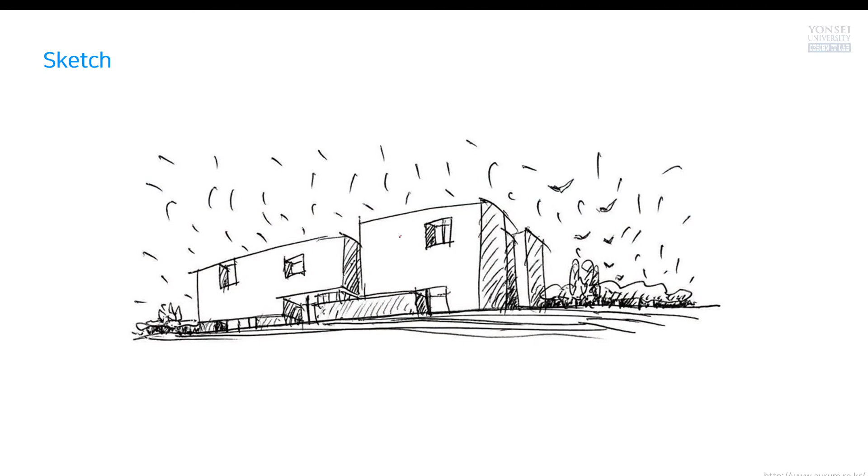First, I'll show you this sketch - take a look, it's a real hand drawing sketch. I'm not sure of the concept, but obviously it looks like some kind of huge mass object.

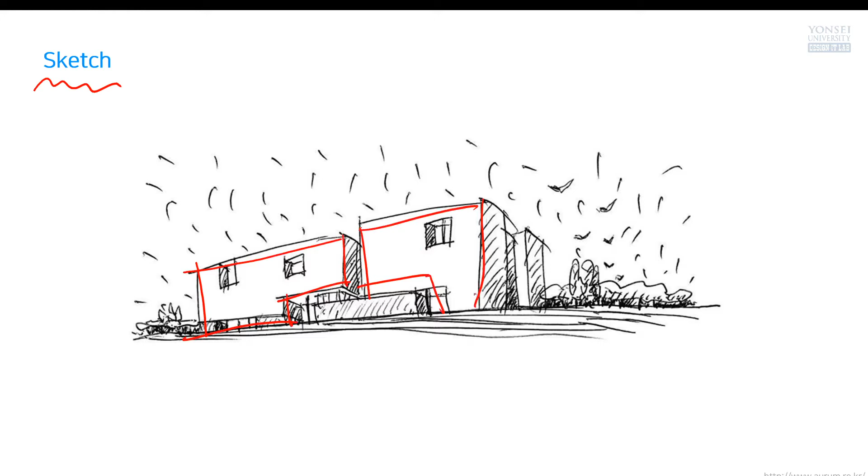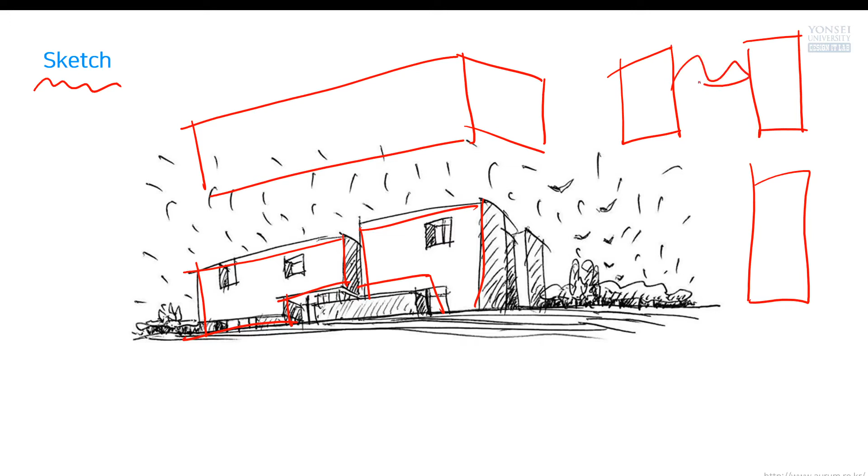But take a look. What if this mass was something like this? One piece of mass, one chunk of mass. That's not that interesting, right? But what if the architect designed something small sized, or high rise, or some totally different shape? In that case, some efficiency or some economical problem possibly happened, right? But this is too boring, too much simple and kind of classic, old-fashioned modern building.

So architect's intent was something cut of the mass here, and something inset, and something divided, and so on, from this chunk of mass. I'm not talking about the concept or some approaches. I like to show you the actual example, actual dormitory. You're supposed to be here anyway.

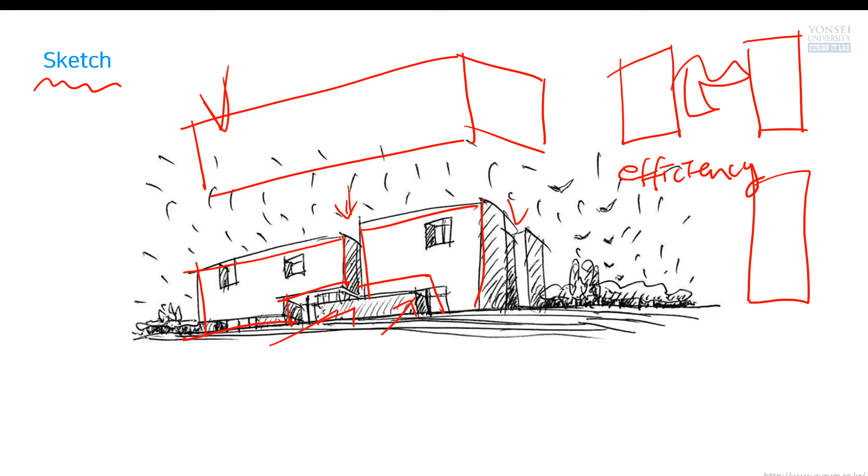Next thing is site plan. I showed you sketch, but actually this is not sort of industry standard. Site plan, this is one of the industry standard drawings. At the beginning of the drawing representation, site plan helps people understand the building mass.

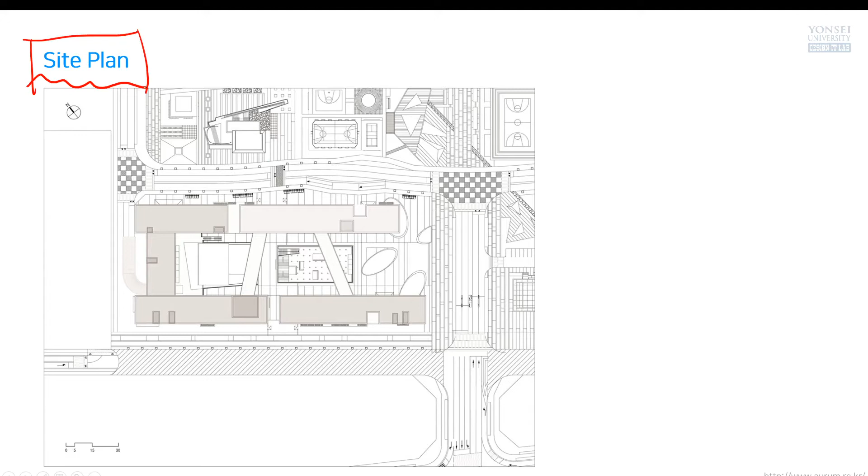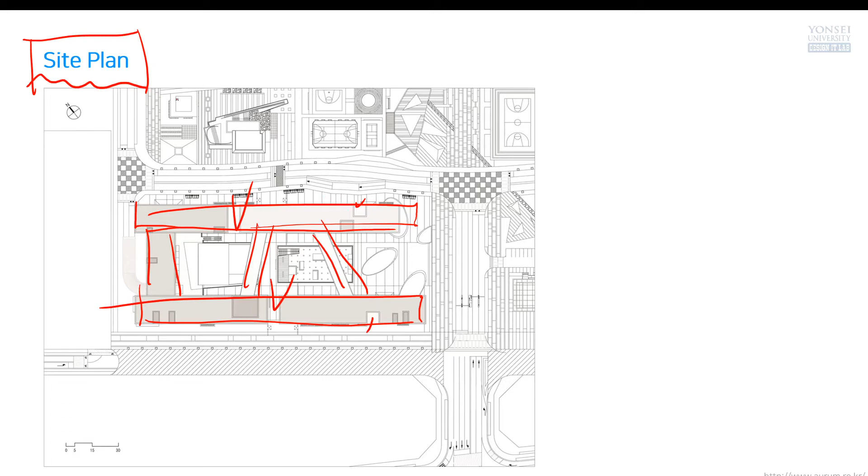Take a look. Two long rectangle shaped and their connection, and two bridges and some cuts, something like that, some insets anyway. So thanks to site plan, we can find out building's mass.

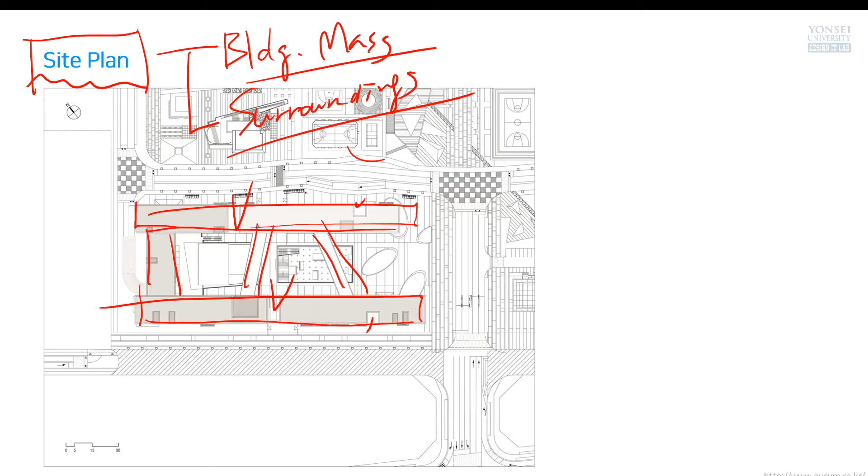Another one is surroundings. So two main things we can get from this kind of site plan view. Take a look, surroundings. Some court for the basketball, I'm not sure, and some kind of gardening, landscaping, and some access road or some certain type of outdoor facilities. I think these are bicycle rack or something similar structure.

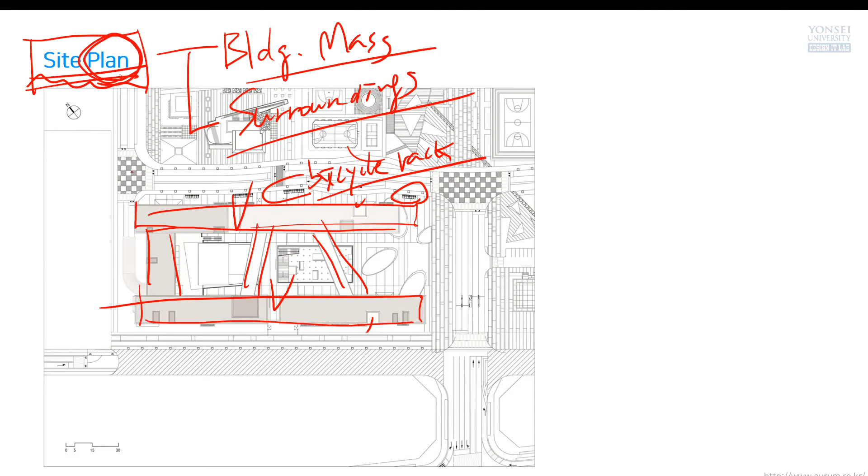Anyway, site plan is one of the representative industry standard drawings. It's under the category of plan drawing, but this is site plan. The most important thing and most representative thing is floor plan. Take a look, this floor plan.

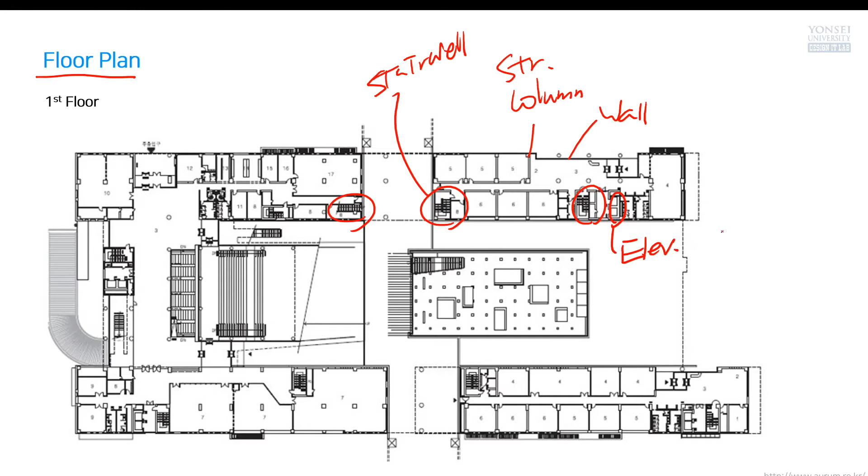Those things are vertical penetration. You know what this means? Penetration means it's opened. For example, what if this is kind of slab, concrete? Penetration is here, okay? You can go up, go down by using stairs or elevators or even ramp or escalators, right? This is slab, floor, physical, actual floor, usually concrete. So this concrete structure mostly covered, but something opened.

That is vertical penetration. Why do we need this vertical penetration? Of course, for vertical access or vertical circulation. For accessing floor by floor, we need vertical penetration, and we usually call it building core. So this building has a lot of vertical penetrations and cores.

Why? This is really huge, actually not that huge, but relatively big sized building, right? So in certain architecture law, architecture code, so-called building code, in Korean, this one - because of building code, we have some kind of minimal placement for this vertical penetration or elevators, number of elevators, number of stairs, or even number of toilets on each floor, something like that. They are all regulated by this kind of code.

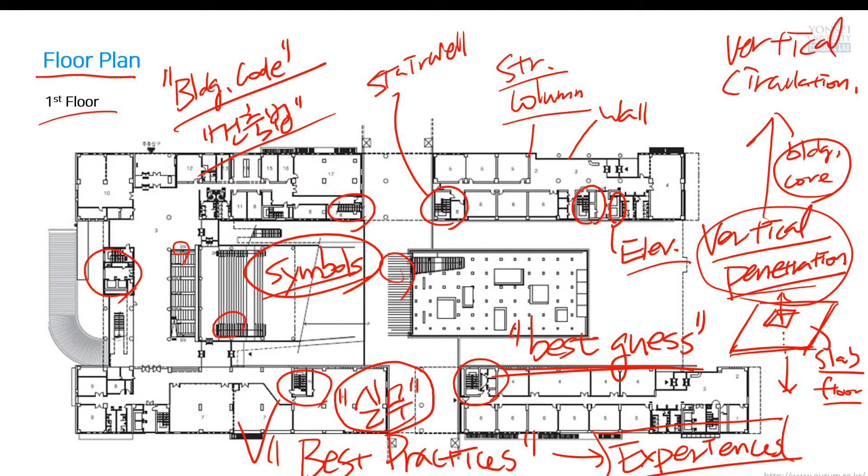Unfortunately, there is no regulation for how to visualize your floor plan. There is no such law, code, or strict regulation. But there are best practices and experiences for how to effectively represent floor plan views using hand drawing or computer tools, BIM tools, software, and so on.

Okay, take a look. Fifth floor, I told you this is a dorm building. A dorm building means as many students as possibly occupied, that's the top priority. I'm not sure about the RFP for this building, but usually we can imagine the top priority is fitting as many students as possible. Actually, I'm not sure this was the top priority requirement for designing and constructing this building, but usually this is very important, right?

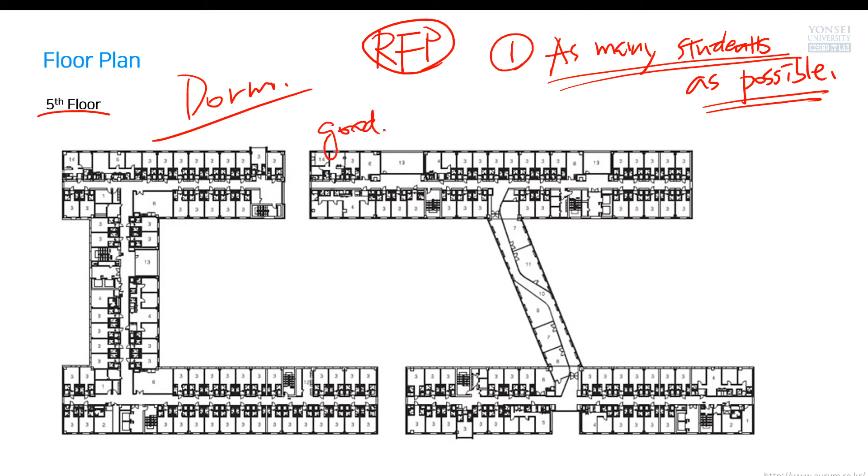So take a look, it looks like a cage or something, but it's not a cage. When we see this kind of floor plan, it looks very high density and not that good for residents. But in my experience, compared to other buildings, other dormitories in other universities, this is really, really good building. Trust me, relatively really good. Anyway, my point is showing you a representative floor plan.

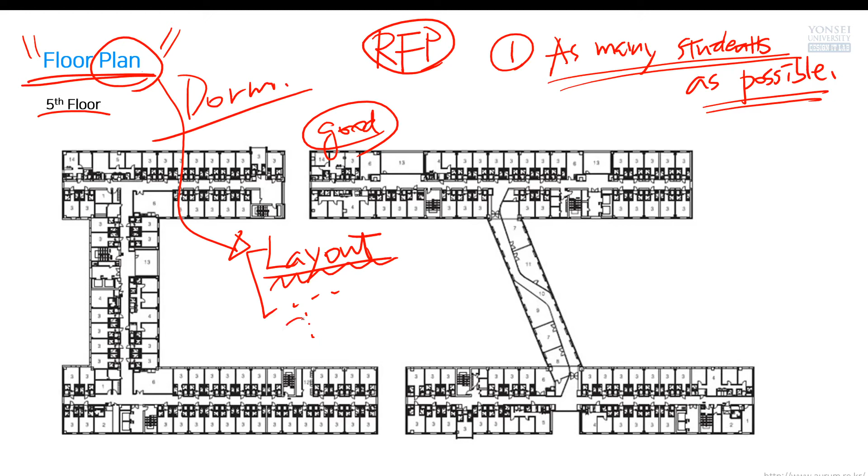Next thing is elevation, take a look, front elevation. I forgot, what's the main goal of a floor plan? It shows you layout, and a lot of something else can possibly be represented on top of this kind of floor plan. You can easily find out the spatial allocation, in other words, the layout.

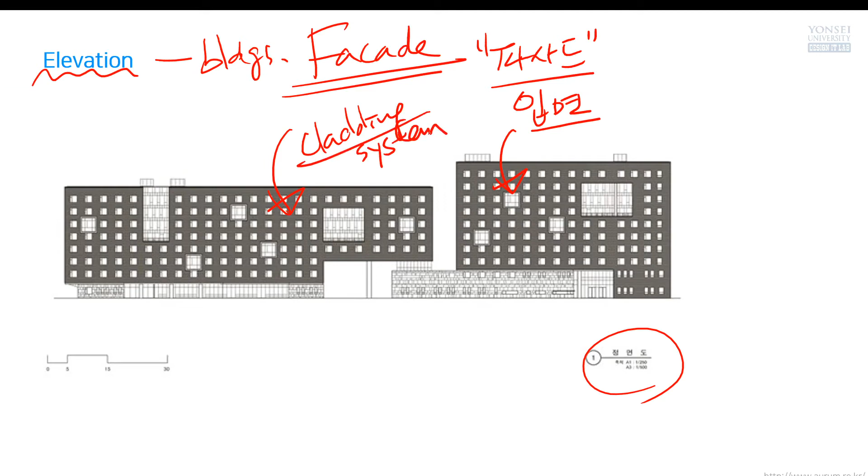So what's the main objective of elevation representation? Buildings, facade. This is a French word, not English. Anyway, in Korean it's the same, facade. Facade means this one. Take a look, what kind of cladding system? You can find out the meaning of this word in a dictionary. Cladding system simply means this in Korean.

Cladding and facade are a little different. Cladding means something about structure, material, shape, or color. But facade is the overall image of the building. As you see, sort of rectangle shapes in order, and some kind of dark colored tile wall structure, wall surface, and some different lower places and cut parts and so on. So the designer's intent was for it not to look like this.

Take a look, just a simple rectangle shape, it's boring, not that interesting. But this one has this kind of cut and something above, something different from the original mass shape. Anyway, thanks to this elevation, we can easily find out the shape of the facade, the image of the facade, and we can make a best guess about cladding systems, materials, or some details, and so on.

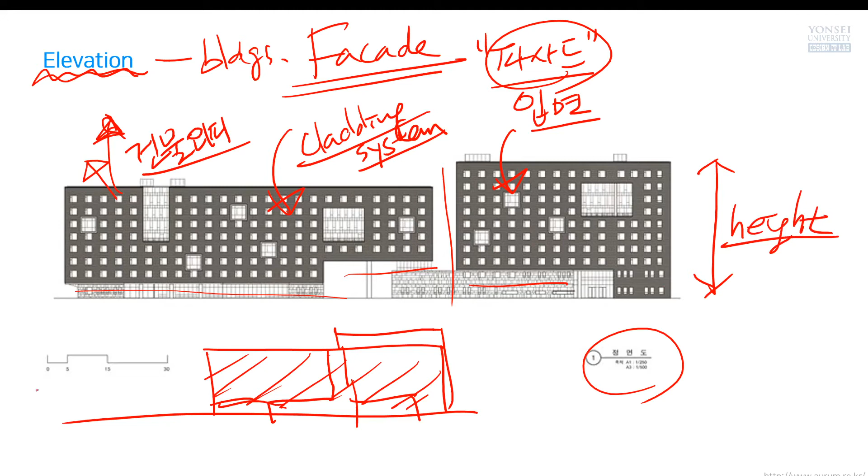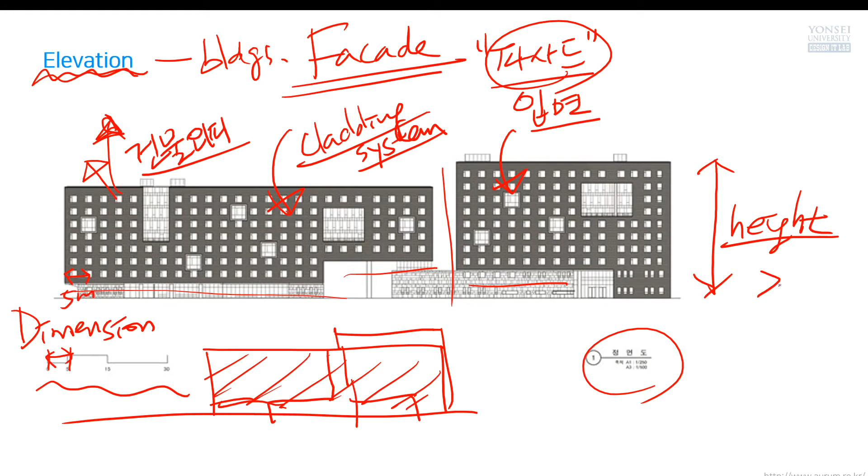And also we can find out height. This is a dimension. Where's the dimension? Probably it was missing from the floor plan view, but thanks to this elevation, we saw the dimension. So thanks to this dimension, we can find out the length of this one is 5 meters, something similar to this, 5 meters. So we can think about the height of this building as taller than 30 meters, right?

Another elevation, right hand, left side, right side, and also dimension is here. You can also figure out the facade image and some cladding systems, looks or material and so on. So that's the objective of elevation representation.

The last one is here, section. Section is very critical because it shows you this kind of vertical circulation and certain type of floor heights. Okay, take a look.

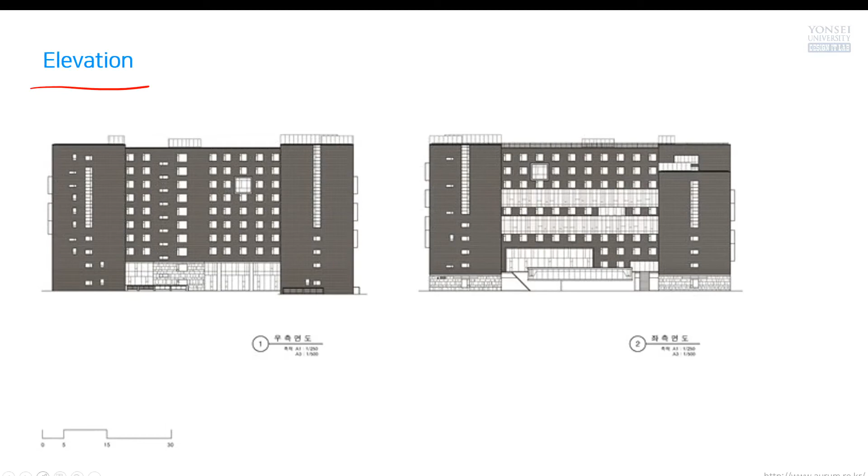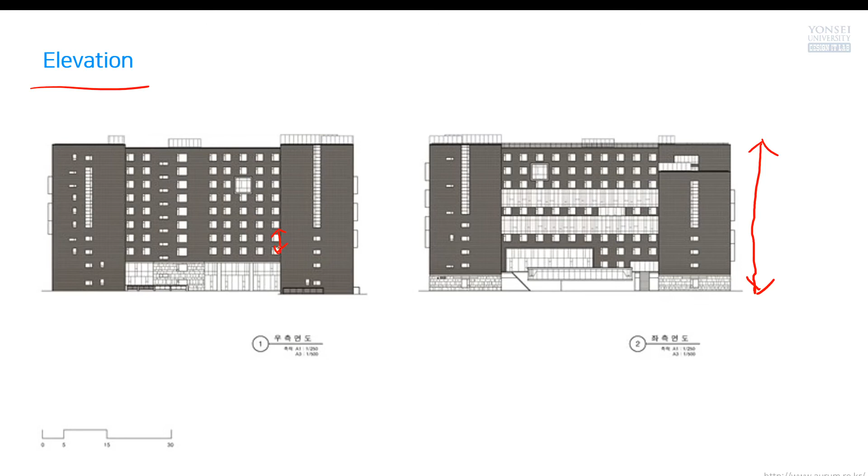In this elevation we can find out the height of the building, but actually it's not that easy to find out what's the floor height, what's the ceiling height, or something else. But thanks to this section, we can find out how many floors are modeled in this design and what's the height of the floor. And this is sort of a plenum space.

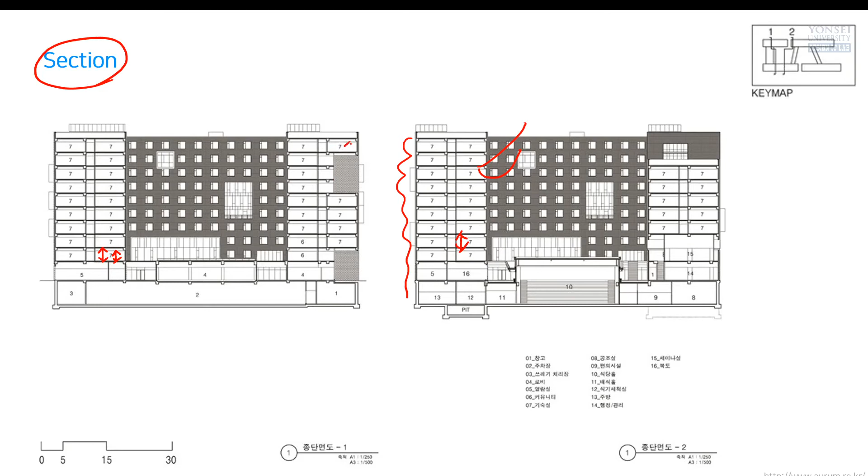This is ceiling, this is the slab. So you can find out, let me show you, it's not that easy to draw this. This is ceiling height, and this is floor height. Again, this is so small, so let me carefully draw lines here. This is floor, sorry, okay let me erase, let me go back.

Let me erase. Okay, I can't erase, I don't know why. Okay, let's do it again.

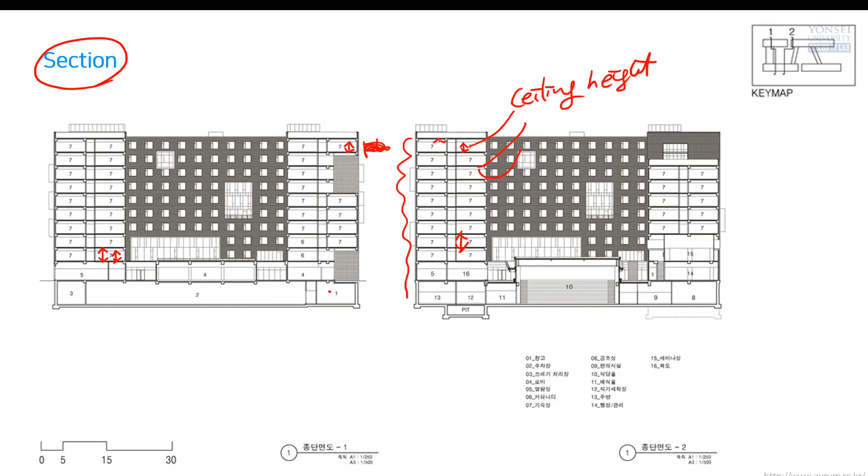The height of this one is ceiling height, and the height of this one, slab to slab, this is floor height.

Thanks to section view, we can find out this kind of ceiling height, floor height, number of floors, and some details about

vertical penetration, vertical circulation, and so on. Also take a look, this is section-1, section-2, and take a look at this key map. This is the section profile.

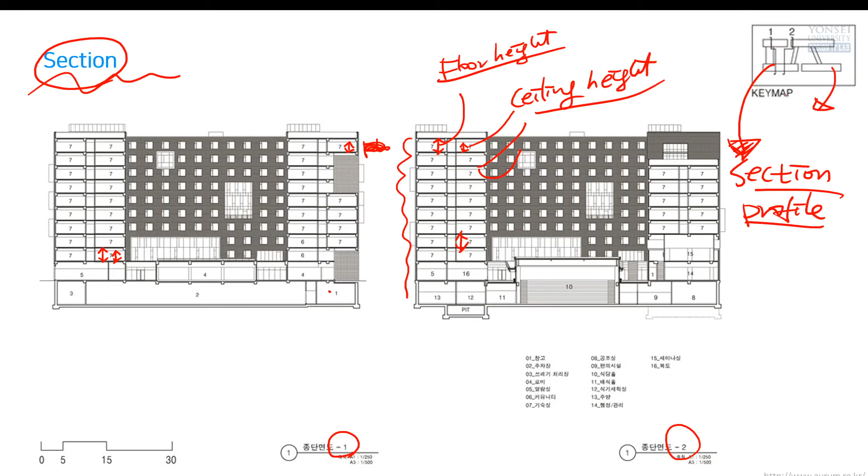Why is this section profile needed? Of course, we don't know where it was cut, or where the location of this section's line is. So by using this kind of simple floor plan view, we simply draw those two or even more lines. This line simply represents the section profile and the location of this cut.

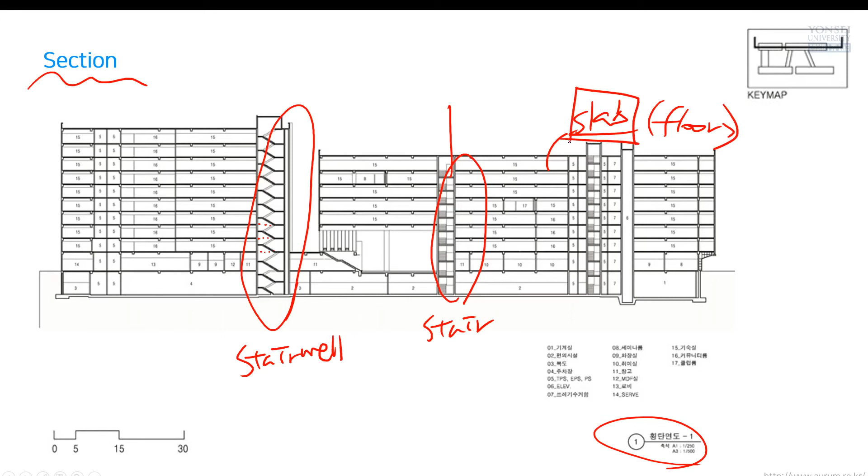Okay, this is slab, in other words, floor, concrete floor, and in terms of building structure, this is slab.

Okay, and take a look, what's this? This is beam, okay, in Korean it is this one. And take a look at this one, I'm not sure, this is column.

Column and beam, they sustain this building because they are sort of very important structural elements, as well as those slabs.

The reason to show you the series of those images, professionally made architectural plan representations, actually these are some kind of additional thing. In other classes or next semesters, in the drafting course, you are going to learn some kind of detailed things about

those symbols and the structures or some representation or something. Actually, they are not that critical, I mean not that hard to learn. That is why I additionally introduce you to what these mean.

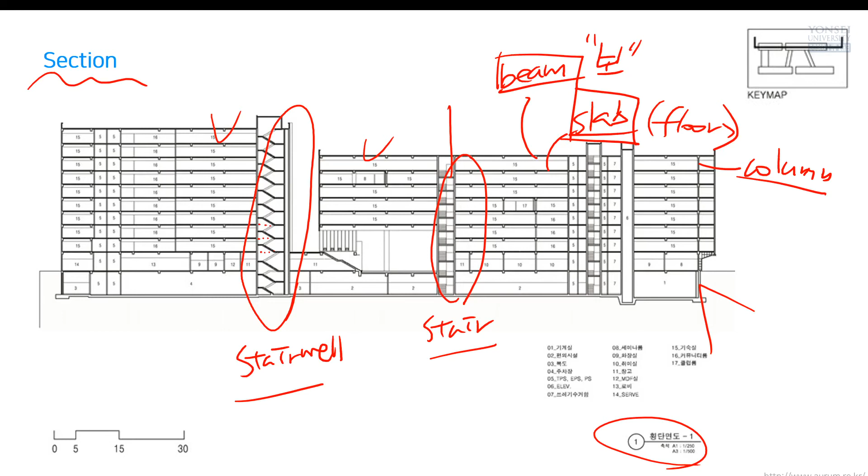But my point here was I'd like to show you the industry standard representation of building. What are they? Simply said: plan, elevation, section. That's all, only three.

In Korean, this is the industry standard representation of building. But you know what, I told you there is no strict regulation or building code law about this. This is sort of a de facto standard.

De facto standard means they are not governed by an international standard organization, I mean ISO or UN, OECD or something else. They are not governed by some official organization or some kind of groups, members, something.

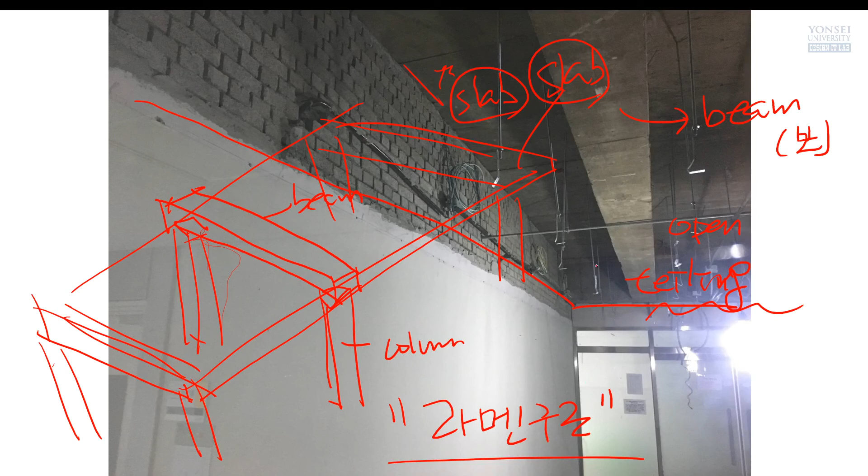So thanks to this removal, we could see this structure, and then I could introduce you to something like this. Take a look, these are some electrical systems and mechanical systems. It's the air conditioning system. And take a look, some of the construction process.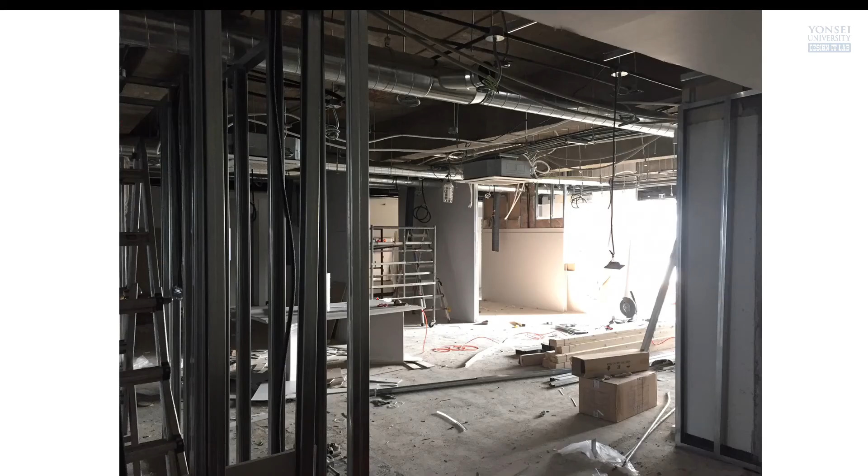All these are non-load bearing, which in Korean is called this one. That means they are almost close to partition walls, partition structure. That is why they're not that thick. But for soundproofing and some minimal strength for maintenance issues, they constructed infill or exterior fill using appropriate material and structure this way.

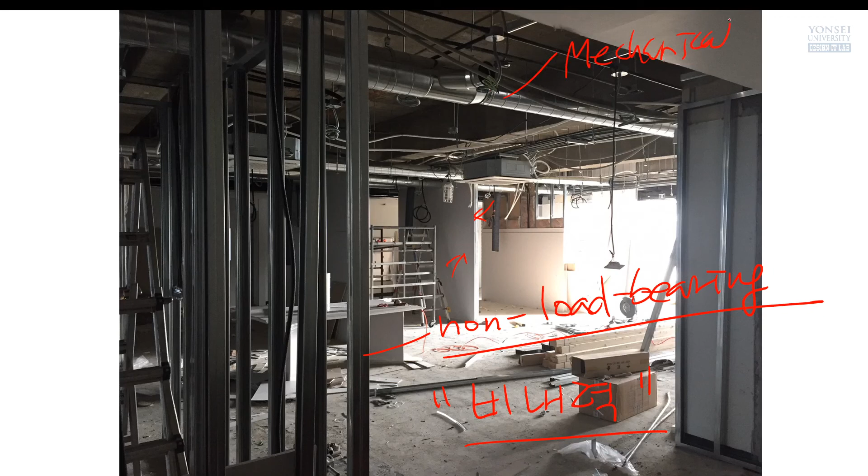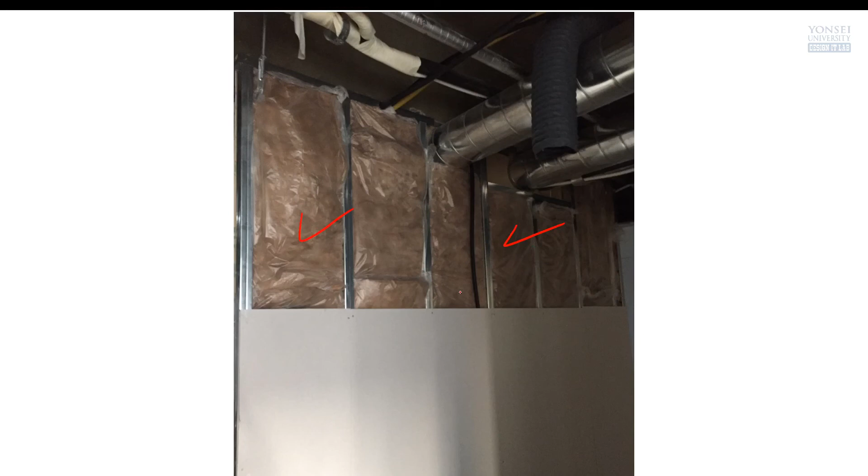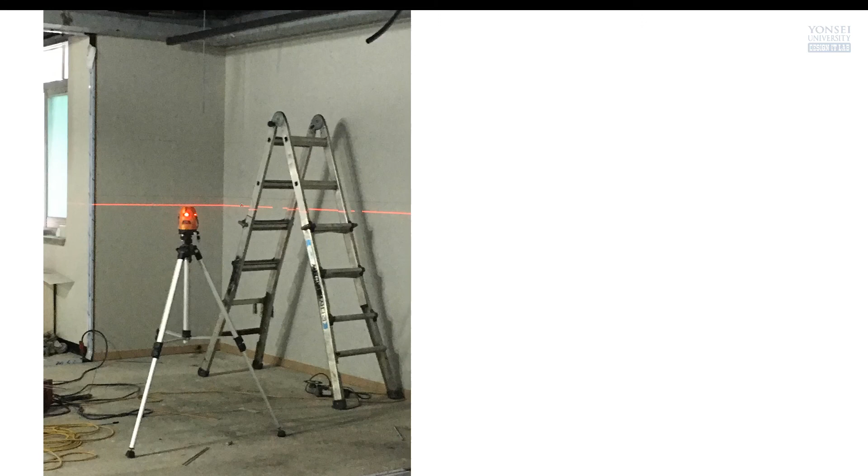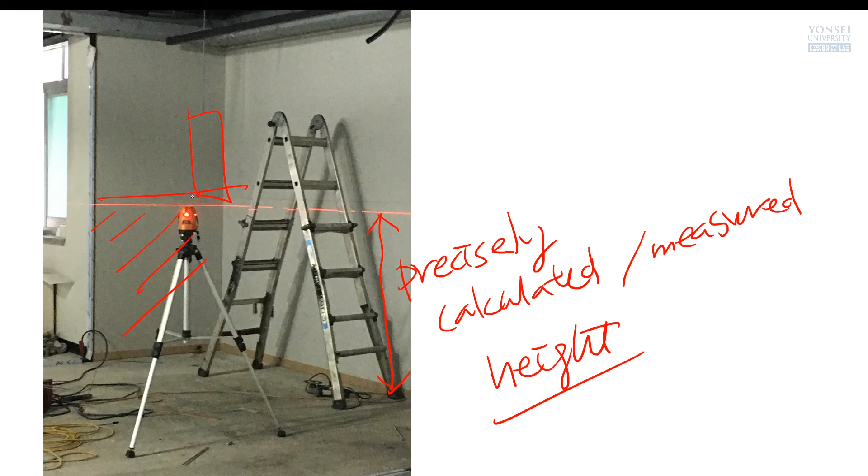And take a look, this is a laser line drawer. So why do they need this one? They want to measure very precisely calculated or measured height. Sometimes they need to install a certain type of different material, or they need to draw something or install something. Anyway, for construction reasons, nowadays they use this kind of laser thing for drawing this one.

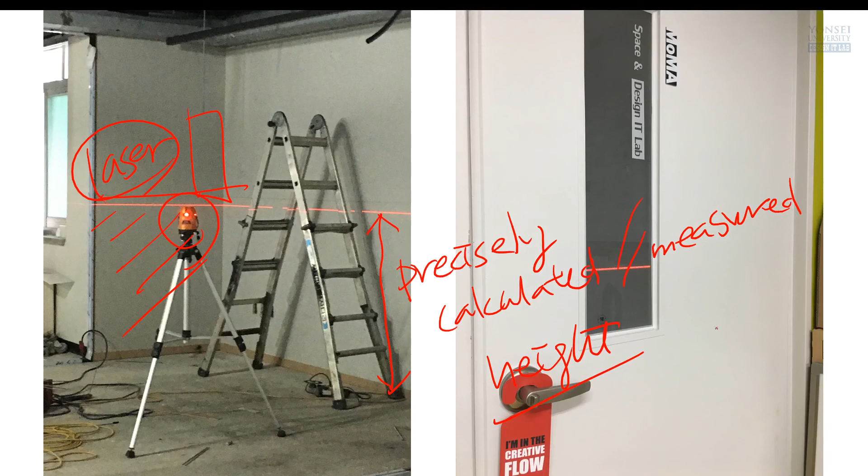This is the laser line, and this used to be my office. When I was working in my office, I saw this laser line, so that's why I could take this picture at the time. Laser line here.

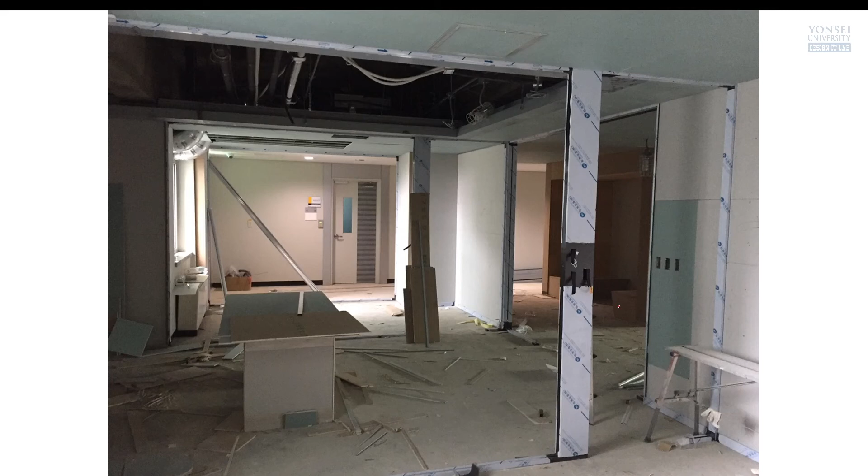I requested them to make this ceiling structure as open ceiling. But take a look, open ceiling used to look like this one. Actually, it's not that good.

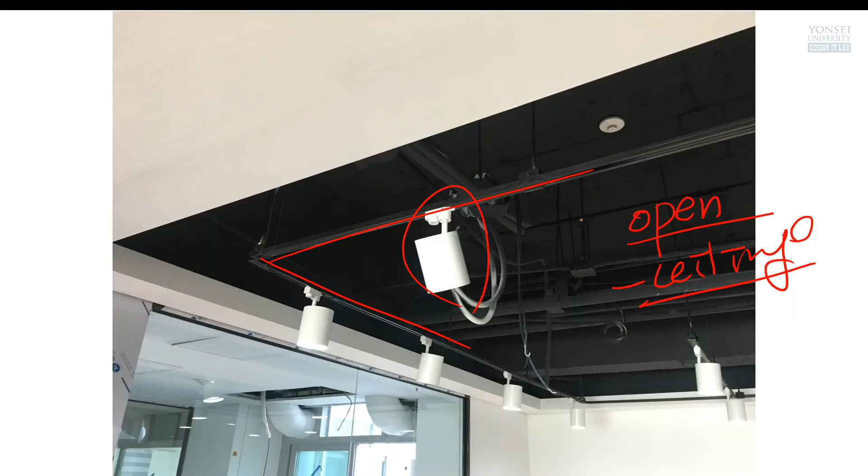So take a look why this one is looking okay. We used some spray - in Korean it's something like this, a field term. Thanks to spray, we could paint - actually it's not a paint - totally dark black color. So at that time my color code was black and white.

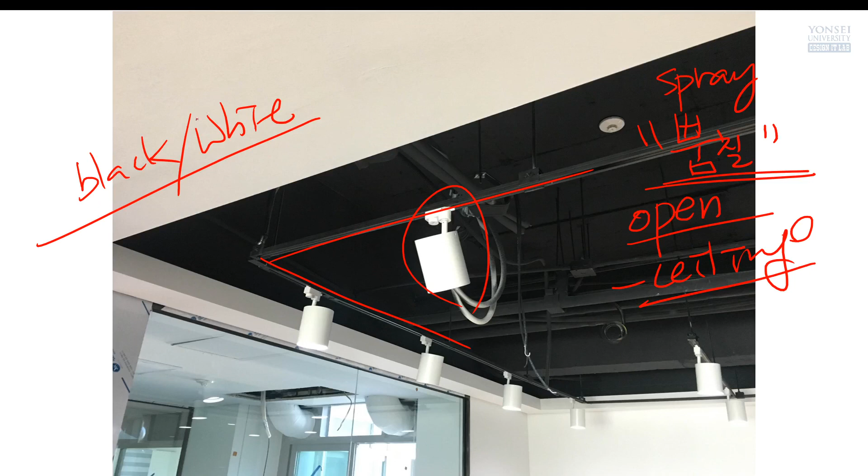Something dark and something bright, a very contrary color scheme. But anyway, this color is so-called safe color. When I was in charge of this color scheme and material for these designing details, I chose a very safe way. You know why? What if I used green, red, orange, or rainbow colors - someone could really dislike it, even though some people would love them. That's why I used black and white, the so-called safe color.

And the final output also looks not that bad. I think that was really great. Anyway, thanks to this safe color, black and white coding color scheme...

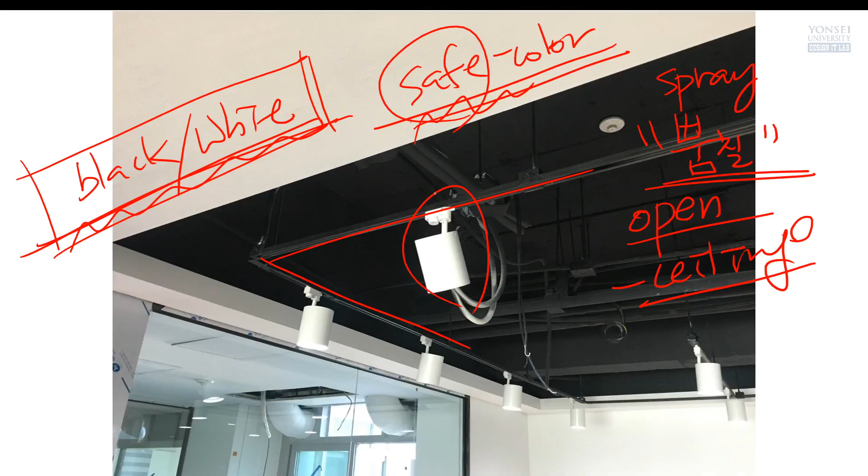So as built, take a look - how about this? This is open ceiling, but dark colored. That's why it's not that visible, so we can hide some systems - mechanical systems, electrical systems, plumbing systems, and so on. Instead, those white colored lightings stand out saliently, something like this. So they look okay and good.

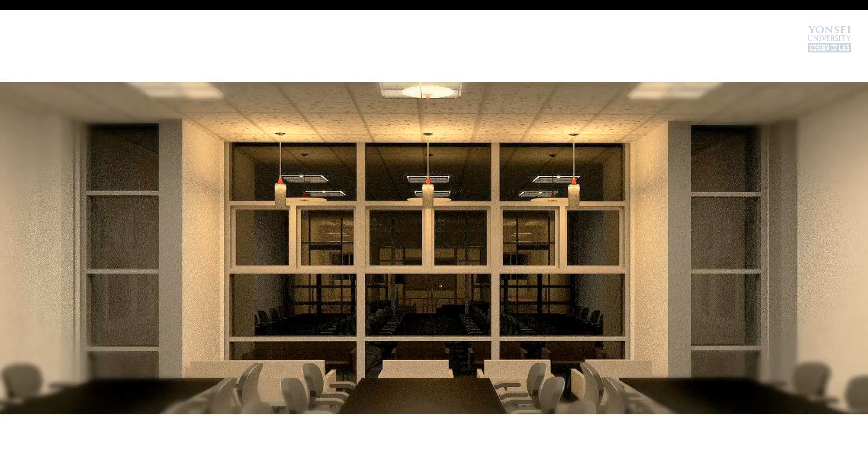Take a look at this structure - this one, this structure. Something different, but at the time I designed it using a 3D tool, something like this, and the reflection from that window - you can see the backside scenes as well.